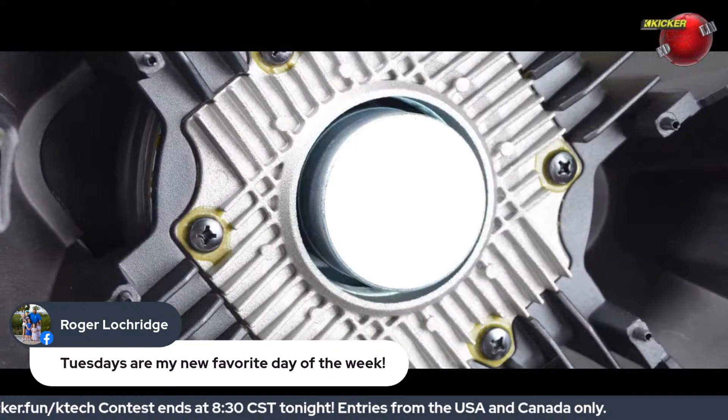KICKER's blue lace spider, solo cone 360-degree back bracing, and a laser-etched cone brace combine as a single ultra-rigid unit. The result is increased clarity, higher volume, and added reliability.

The square cone features over 20% more surface area than round subwoofers. It's attached to a Santoprene surround, then stitched to the cone for long life and durability. This surround features KICKER's patented ribbed corners, which fully dictate cone motion and extend surround life.

At the base of the unit, a pair of custom formed flanges integrate seamlessly with an extremely low profile mounting system, consisting simply of a mounting plate and bar. Once installed, the overall height of the enclosure is only 9.5 inches. This profile is small enough to work perfectly in countless trucks, sedans, and SUVs.

Once again, KICKER sets a new standard with the groundbreaking design and unparalleled performance of the all-new L7 QB8.

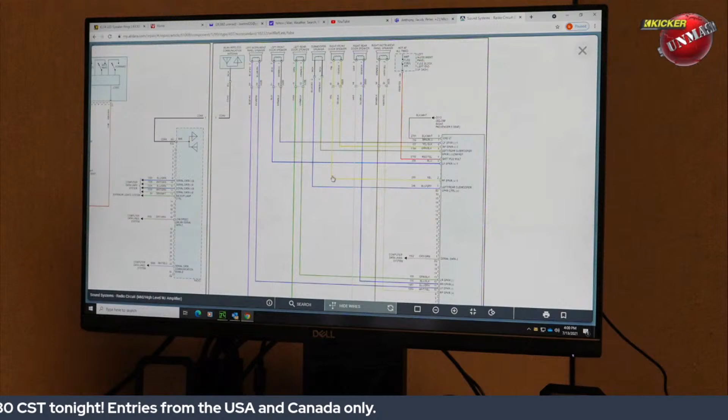And Ernie's got a couple screenshots up here, some photos we've taken, so you can see this. If you're looking at the ALLDATA, this is a database, really from an engineer's viewpoint as far as how the wiring in a car is laid out, whether it's just the radio to the speakers, the radio to an amplifier to the speakers, is there a subwoofer, is there a subwoofer amplifier?

So you guys have access to a lot of pretty deep information here that you can help a customer troubleshoot and figure out how to get this into their car. Exactly, yeah. So that's a great thing I want to talk about there. So if you got pre-sales questions, these guys can help you out with that as well.

And then last but not least, because it happens, built by man, broke by man. I bought my KICKER product, I put it in my car, my amp's turning off, my headlights are blinking, my speaker quit working, there's no bass. There's a whole host of things it could be.

They're going to call in if they've got an issue with what they think is a broken product. And there's basically 2 steps that happen upstairs, if I'm not mistaken. They actually start with customer service, correct? Yeah, typically a call comes in and they tell the receptionist they have a broken amplifier. She'll ask if they want tech support first. But 9 times out of 10, they'll go to warranty because they just want it replaced.

But if they're willing and able to, a lot of times they'll get them to tech support, so me or the other guys, we'll be able to diagnose and troubleshoot. There's simple steps for troubleshooting, but it leads into more complicated ones as well. But if we do determine the amplifier is defective, then it'll get over to customer service. Or if it's a woofer that's blown, we can at least try and figure out why it blew, whether it's settings on the amplifier or they just had it cranked to 11.

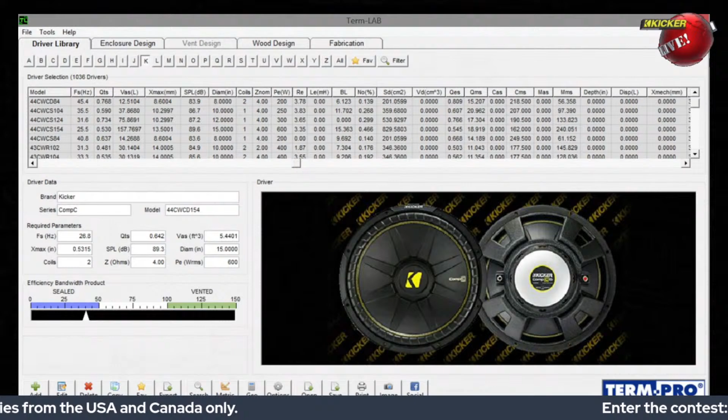And so let's just create something make-believe here. I'm Joe, the customer, I just called up. What woofer do you want? Really, I like L7s. Okay, so let's go with an L7. Let's do an actual box design here on Term Pro so you can get an idea. And you guys do this every day on the phone for customers? Oh yeah, and we can get at least a rough idea of what we need.

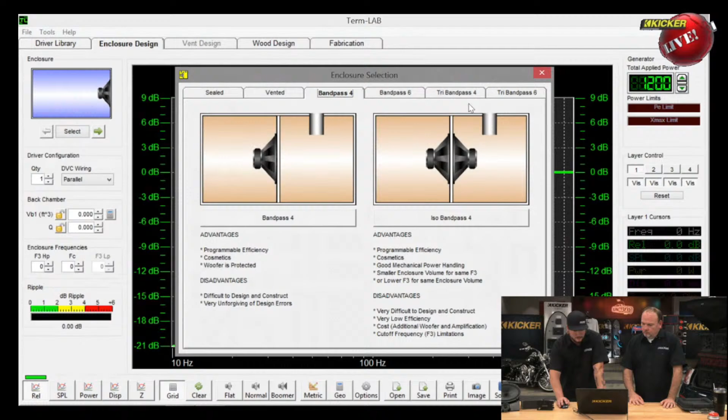It knocked out fairly quickly, and we have a lot of people that want to call in for SPL and want to do bandpass, or they want it for a side-by-side and want a bandpass enclosure because that works really well outdoors. So we'll just go ahead and do 2, and we can do just a simple 1-to-1, so 2.5.

This looks pretty easy to use. Yeah, it works pretty quick, and everything's adjustable on the fly.

So after you've gone ahead and set your outside chamber volume, that's your sealed side in this, and then common ported chamber, that's what you're dealing with here. And then this obviously is the response graph over here to the right-hand side.

Correct, and so it shows our 4th order bandpass, we've got peaks on both sides. And then over here it shows our frequency response for full bandwidth. So 36, 38? 36 is the F3 on the high pass, up to 86, centered at 50. So 36 to 86, centered at 50. And then you can manipulate this.

So obviously with this kind of box volume, if this doesn't work for the customer at all, you could either try to make the same drivers work in that airspace, or you might end up actually saying we need different driver recommendations. We can always end up going with smaller woofers. One that we see used a lot in outdoor or side-by-side applications are shallow woofers, so the Comp RTs and the L7Ts. And we see those used, we actually do use those a lot.

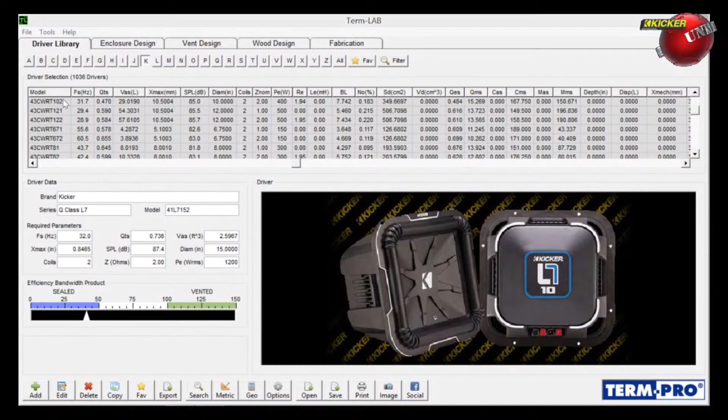So we can do a Comp RT10 or CWRT10, do a sealed box. We see these used a lot in side-by-sides. Obviously, this is way more airspace than we typically see, but exactly, it still, we see our response curve give us an idea of what area it's going to take up, and how changing box size changes tuning.

And obviously, as I'm looking here, you have the ability to go change power. So I'm assuming that's just defaulting to the RMS power rating of the woofer. Just defaults to the rated RMS of the woofer, or how much power we want applied. But you can always change that, and it'll typically change the response of the graph, it'll change what we see in SPL output. Gotcha, which, right there.

Okay, so this gives us a guess of what it's going to do as far as output goes - a relative response curve and a relative idea of output based on that power level.

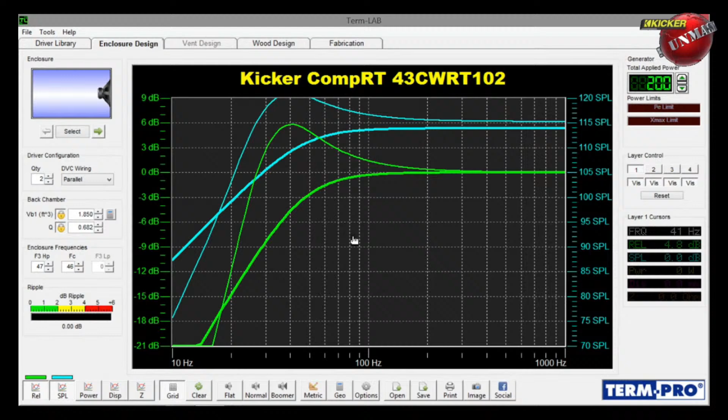And then I saw you going over to wood design. What does that do for us? That'll show us an idea of what the box should look like. It doesn't give us woofer, but it gives us an idea, a little bit off, but it gives us an idea of how much room it's going to take up overall. So this is saying total volume is 1.9 after woofer displacement and what we set the internal airspace as.

Question on this - when you guys are designing this up for someone who calls in, do you just give them this information over the phone, or do you have the ability to email, fax, or do anything like that with it?

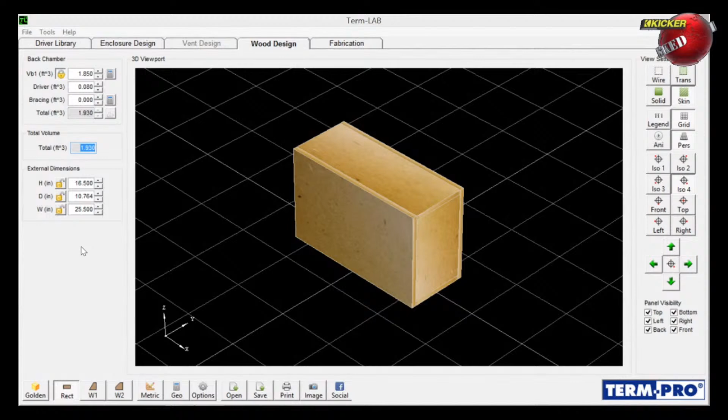We can email it because it will give us a cut sheet. Typically to open a TermPro file you have to have TermPro, so typically we can just take screenshots. That'll give us our top and bottom panels, front and back, and our sides. And with a wood design, we can take away visibility so we can still see what the inside of the box is going to look like. That is cool.

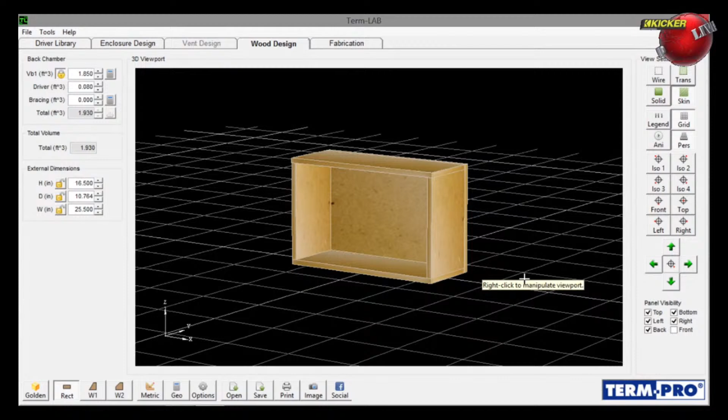So you've got the ability here to, on the fly with people on the phone, design up a box, change the volumes, play with the tuning, play with the power, and when you get something that looks realistic for their needs, you can screenshot it to them, give them what our external dimensions need to be, and then click over to fabrication and give them a few screenshots of what our cut sheet needs to be. Wow, that's awesome - makes things easier.

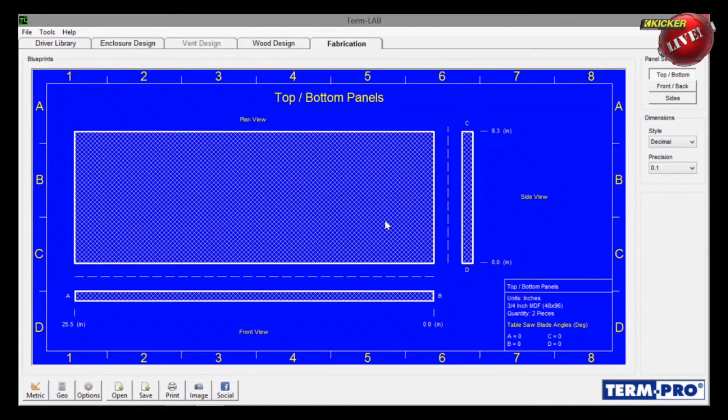We talked a little bit earlier today at lunch - you've used Findbox, you've used TermPro. As far as one that's easier to use on a daily basis, you said TermPro was definitely the way to go. Typically with ported enclosures, with Findbox, since it's all metric, it's forced to do a round port - don't have a choice - and it does it in centimeters squared. So you have to convert from centimeters squared to square inches just to get what our total value of opening needs to be, and then we can decide whether it needs to be a slot port or a round port.

So by the time you've done all the math calculations, the person who's calling, they've already had a second child and they don't even own the car anymore - it's already down the highway. Definitely, for sure. So that's pretty cool.

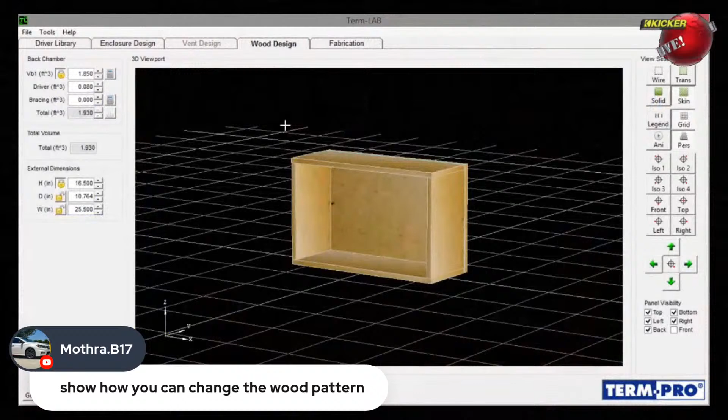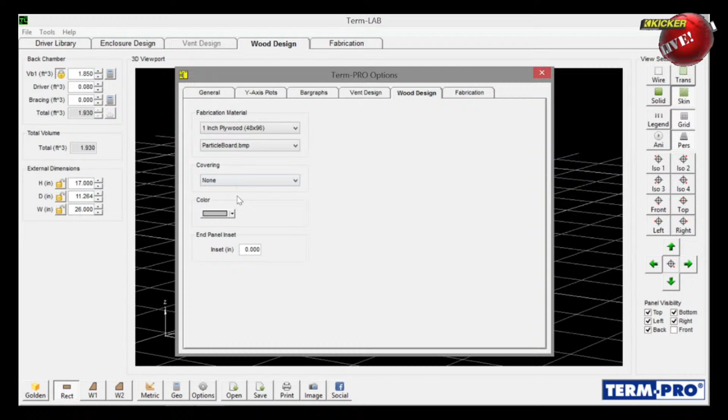And what material you want to use as well - it's got a lot of preloaded dimensions there. So 1 inch, 3/8, we can change it to plywood, and you can also change your coverings. Oh, this ought to be good - particle board with aluminum.

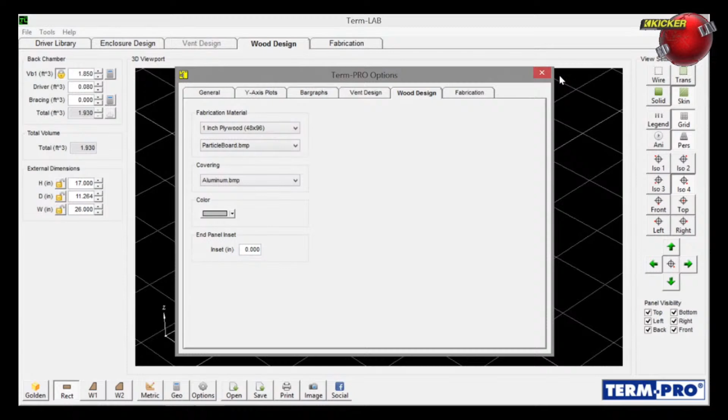There we go, nice. So it kind of looks like plywood, but it's got an aluminum sheen to it. Check it out, that's pretty cool.

So after using both programs, if given the choice, you'd find TermPro is much easier and quicker to use on a daily basis, as far as answering phone calls and dealing with people. It's more user friendly.

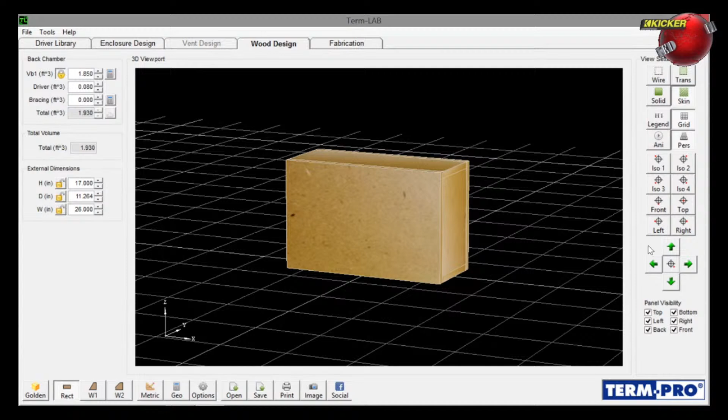What I'm wondering is, this one does give us a render, an idea of what the box should look like, versus where FindBox does not. So you do get an idea of that right there.

So for the L7, I want to look at an L7 T104. Let's design that one up and build a box for it. Ported or sealed? We need to decide - just do whatever you want. I don't care, vented or sealed. It's your show, I'm just here for the ride. We'll do a single reflex bandpass.

Perfect. We'll just do one woofer. So typically, even with shallow mount subs, we usually still end up about the same size as a full-size box, or the same size we would with a full-size sub, just because if we try to make it smaller, we lose so much output.

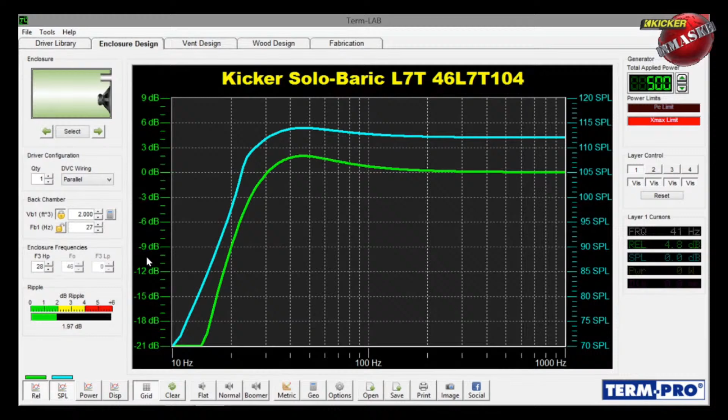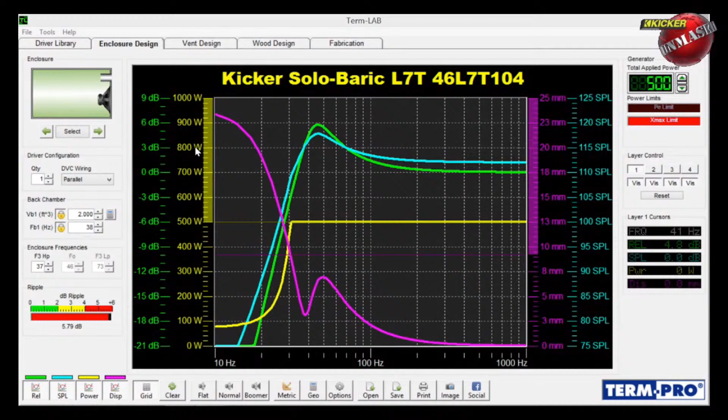It always wants to try to tune it super low, so we can't always bring that back up. And as far as vent design goes, it gives you multiple options - we can do a flared aero port, a round port, or a rectangle slot port. This is an awesome tool we have at our disposal, and we get to use this every day to help people design whatever fits their vehicle and get their woofer sounding the best way it can in their car. This is really cool.

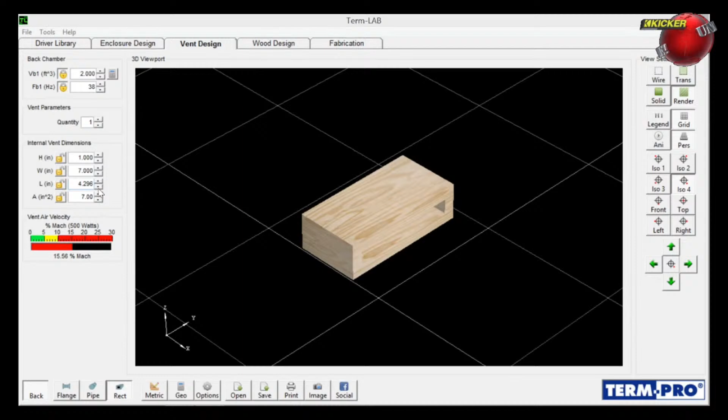And it does show us port velocity. Now, port velocity - again, I'm leading the witness here - basically is how fast the air is moving in the port, back and forth. It's its speed. Is there a speed you want to avoid? Anything over 15 meters per second.

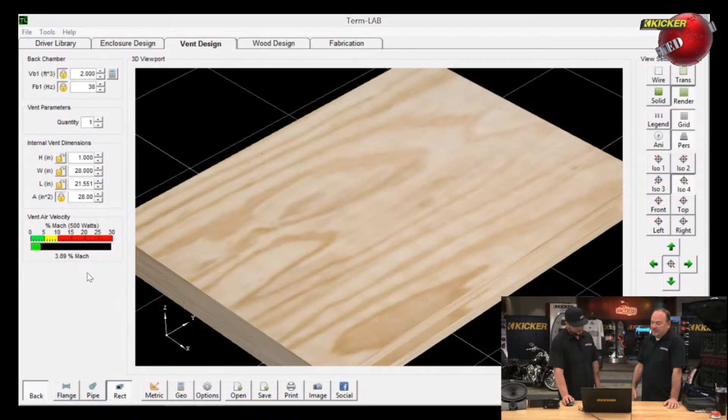And if you're faster than 15 meters per second, you'll hear it - chuffing, huffing, port noise, everyone calls it something different. You can see this here, and this is the speed displayed in Mach, though I'm not sure of the exact conversion. But I've built a couple boxes out of this program, and staying in the green is good to go. 15 meters per second is kind of the industry standard - try to stay at that or less and you won't have to worry about port noise in a box design.

But even if we end up having to use small ports, like round ports, because of how big our box is or anything like that, typically an aero port is going to help resolve some of that noise issue.

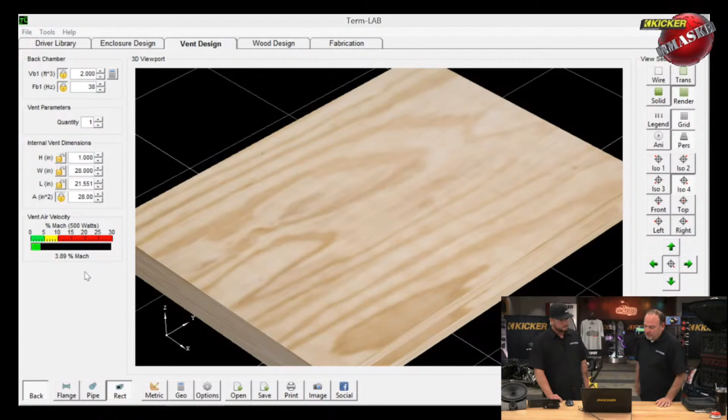Okay, this is interesting. So I'm going to go back - let's switch back to the feed here. JW, do we have any questions? I'm going to bring the screen back up so we can see it, and of course get that wonderful effect I love, which is that it looks like you're looking in a mirror that's on a mirror, and it just keeps going - I love that.

DIY Audio Guy asks if Term Pro can print to PDF. I don't know, not that I've tried. I haven't used that feature of the program yet, so I can't say. Let's look - let's just see if it does, let's see if there's an option to do that.

So let's go to Wood Design, go to File, Print, select printer - Microsoft XPS Document Writer. On this laptop I don't have any printers loaded or any PDF option, so it's probably just defaulting to whatever the standard is, which is that.

But if it'll print to a Microsoft XPS document, I'd be willing to bet this would print to a PDF too, because it would be the same type of capture. I only have the one option on this laptop, the XPS printer, but I have to believe it'd print to PDF. We need to find that out - I'll try it on another computer and we'll bring the results back on a future show.